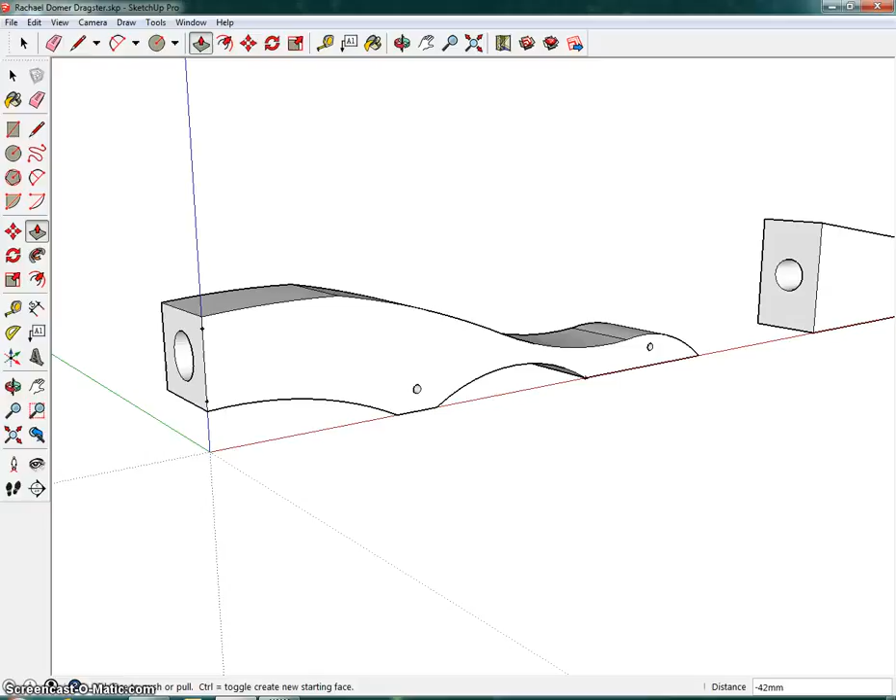The next couple videos will be challenging, so please pay attention closely.

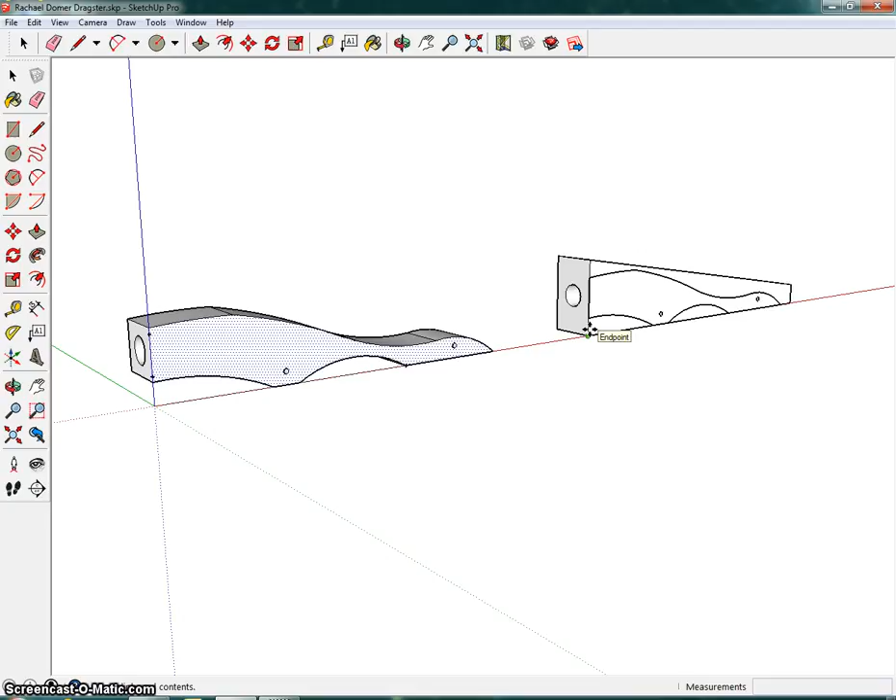I'm going to zoom out a little bit, click on the surface of my side view, and copy or Control C on the keyboard and paste. You will see that it is following my mouse around. I want to place it onto the other block, and once it looks like it's snapped onto the right location, click once on the mouse to drop it.

So we want to focus now on this block for our bottom view. Before we get drawing, I'd like to make a couple marks at the bottom. Using the hand tool or the orbit tool, we want to look at the bottom of the blank, and I want to position it in a way that I can see the full bottom, and then I can also see the hole in the back.

The first thing I'm going to do is draw my line of symmetry, which is going to be from midpoint here to midpoint on the other side along the red axis.

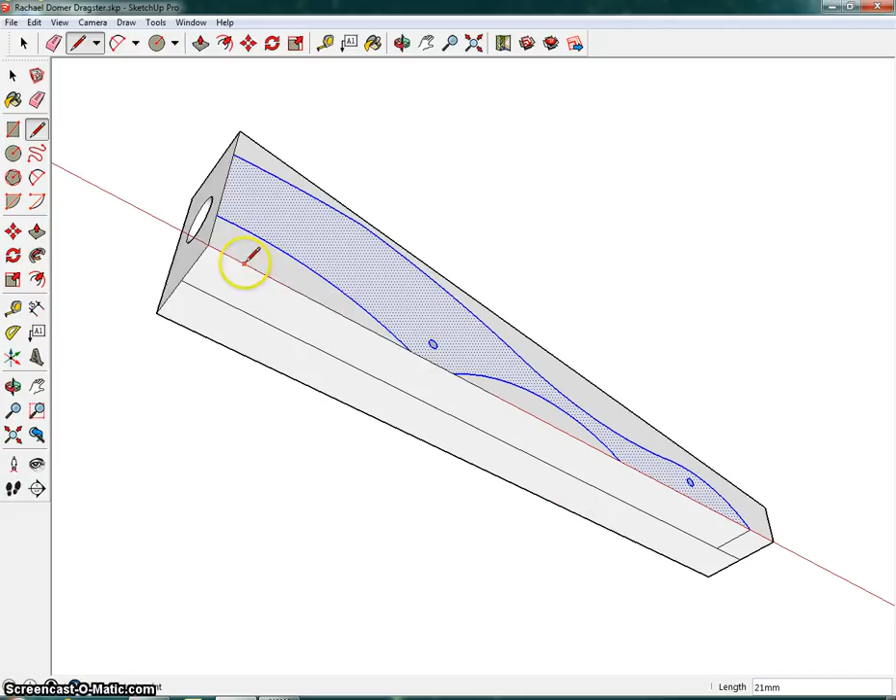Next, I want to draw a line for the bottom of my car, clicking from the front of my car to the line of symmetry. Then I want to locate the right side of my circle, my dragster hole, and draw a straight line coming down, keeping the line blue.

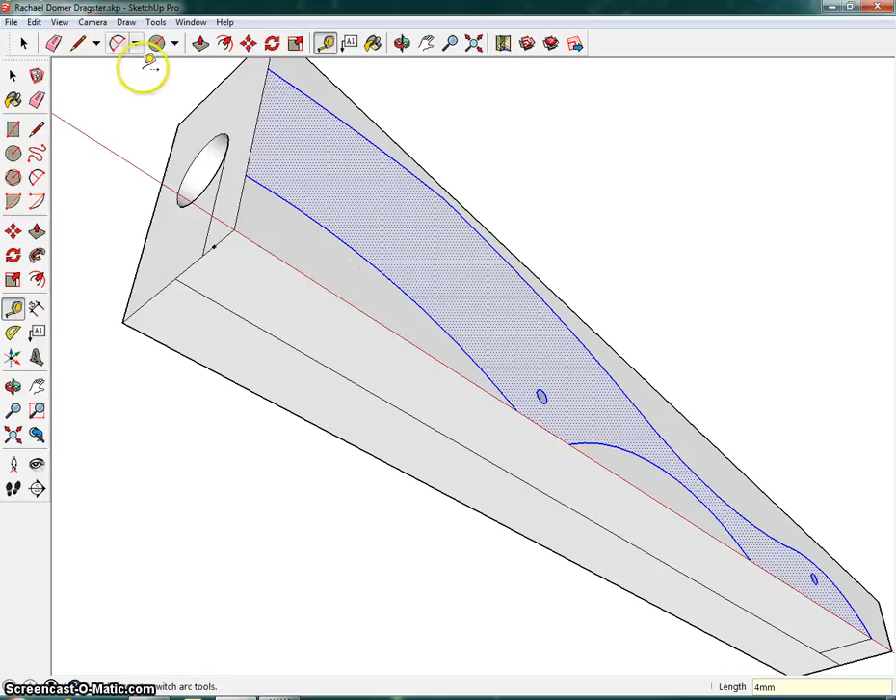As we said before, we want to make sure that we are at least 4 millimeters away from the dragster hole. So I'm going to click on the line that I just made, type in 4 mm, and then enter. I know that when I start my bottom view, I do not want any closer than this dot right here.

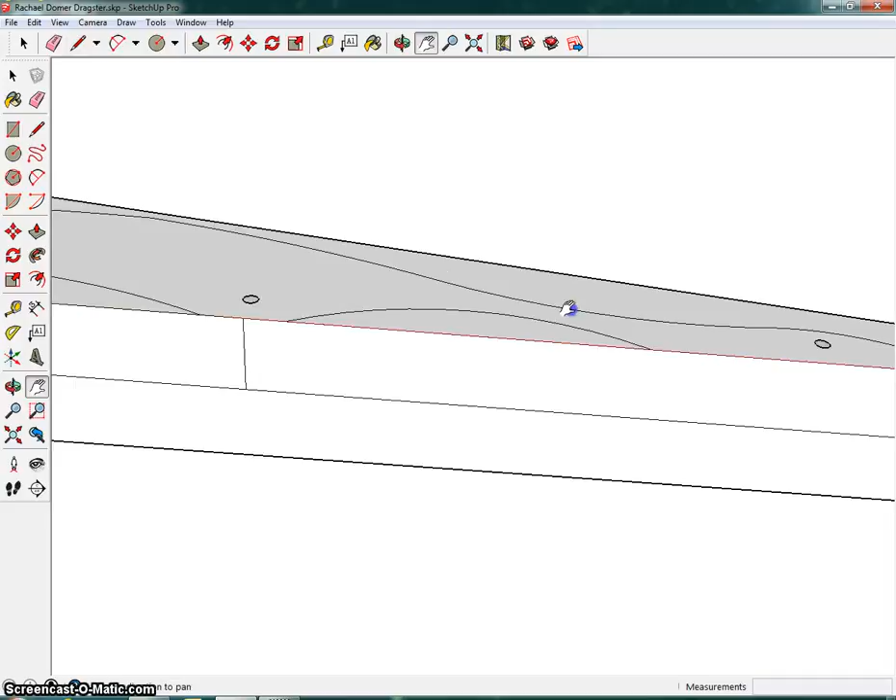The other marks that I want to make: I'm going to draw a line from about where the center of my first axle hole is down to the line of symmetry. And I'm going to draw another line about where the front axle hole is down to my line of symmetry. We know that from our specifications and limitations that we want the body width at axles to be between 35 and 42, and that's why we've made this line right here.

The last thing I'm going to do is make a guide mark here. I'm going to click once, bring it up, type in 10 mm and then hit enter. This is going to tell me that I don't want to get close to that line of symmetry because, again, if your car is too thin, when it impacts the end of the finish line, it will break in half.

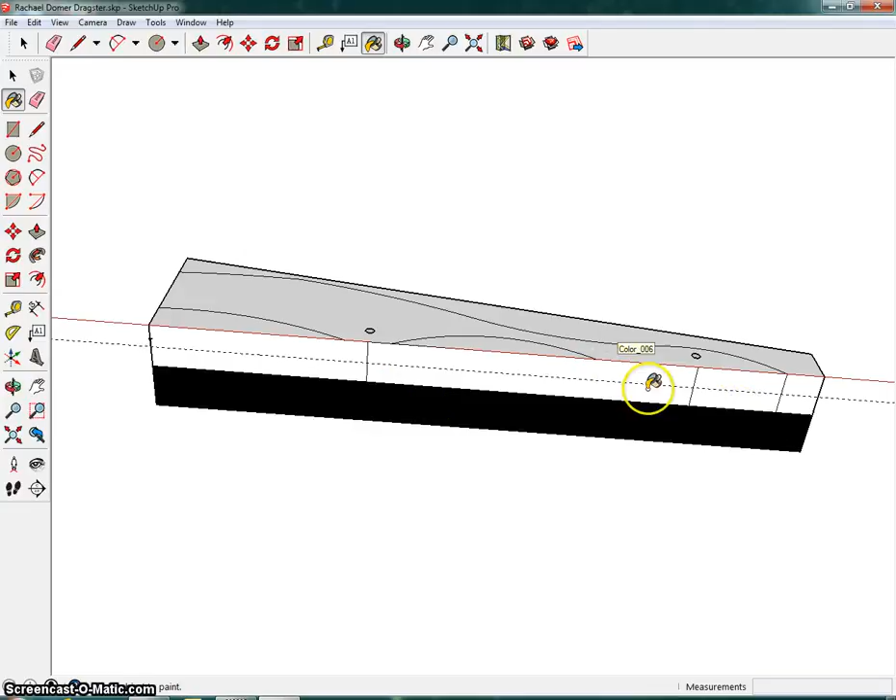So from here, it looks like we might be ready to start designing our bottom view. We are only drawing one side of the car. If you want, technically, you can use the paint bucket and shade in the right side that we didn't add anything to, black. Again, we are only drawing one half of the side.

If you want, you can always take one of your bottom view drawings and fold it in half, so this way you can kind of see what you're drawing. So I'm going to improvise this a little bit.

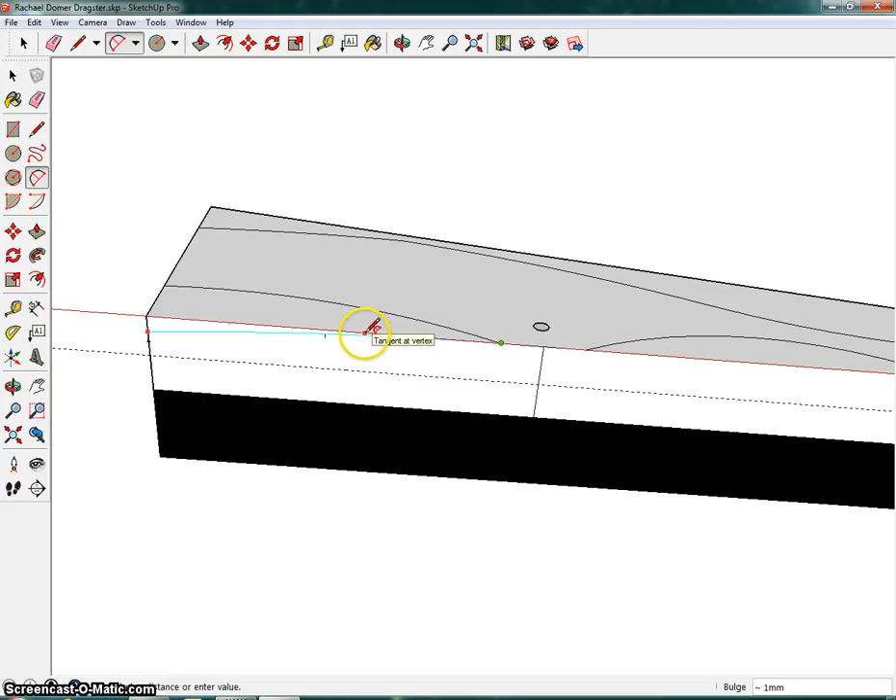What I might want to do is start somewhere along here, because again, I don't want to start on the guide mark. I want to start a little above. And then I can come up to this end point. Again, I like when Google creates the blue line, it's a nice fluid mark.

And then I'm going to draw something from maybe about here to about here, and I can come all the way down to this guide mark. And then from about here, I'm actually going to bring it all the way down to my line of symmetry.

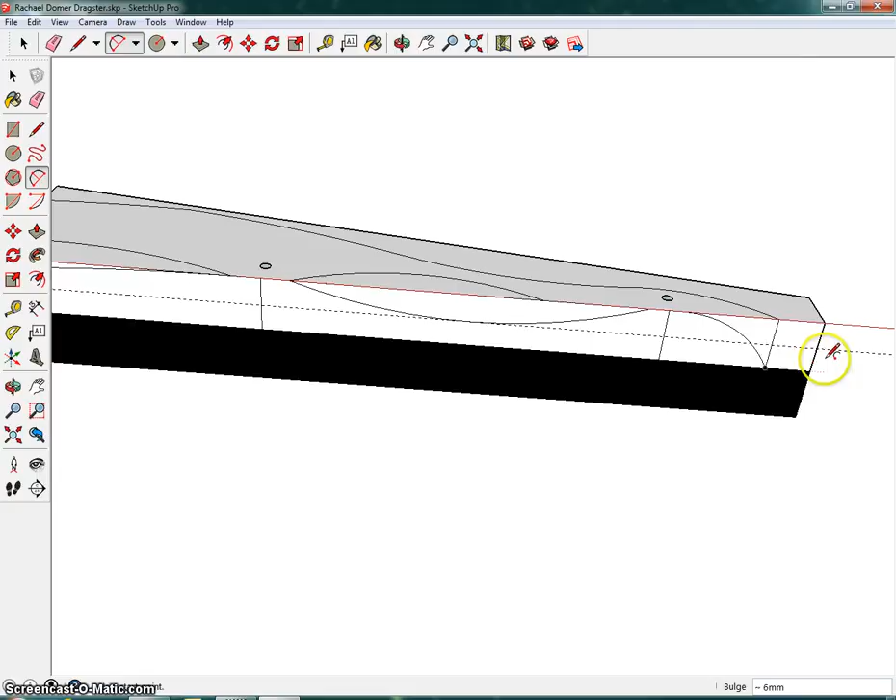If I am happy with my design, I can tell that from the body width at axles right now is 21 millimeters, and again, we drew half, so that would be 42 millimeters, which would be our maximum, which is perfect.

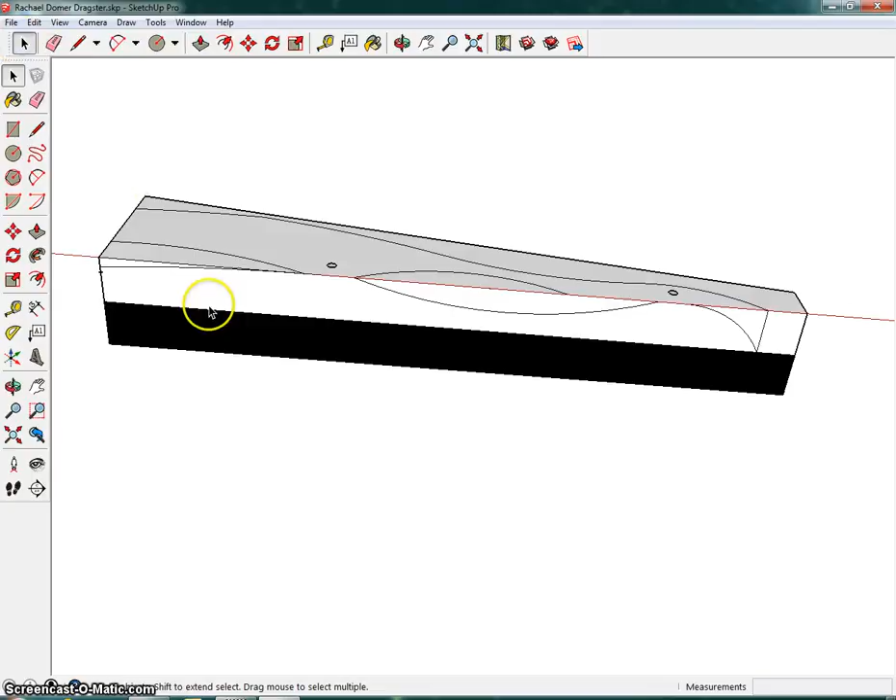So what I'm going to do now is erase any of these lines that I've created in between, and I want to be able to click on my bottom view so that it is one solid face, and I can see that it is one solid face.

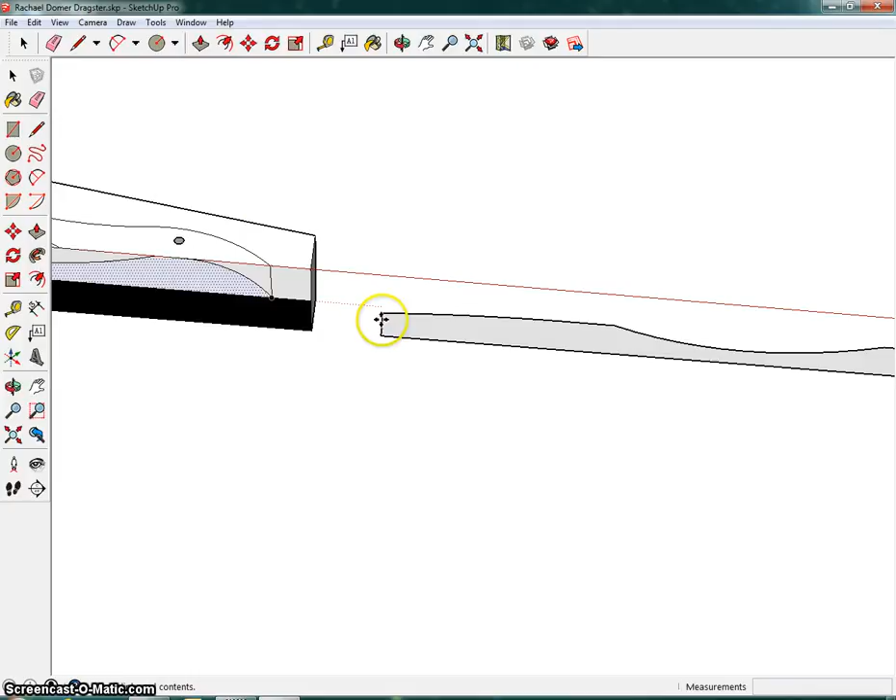From here I'm going to click on Edit, Copy, and using the Orbit tool, I'm going to bring this down a little bit. Using my Pan tool, I'm going to bring this off to the right, and I'm going to hit Edit, Paste, and snap this a little in front of the car.

If I zoom out, I have three components now. I have my side view completed, I have what I've set up for my bottom view, and then I have a copy of the one side of the bottom view.